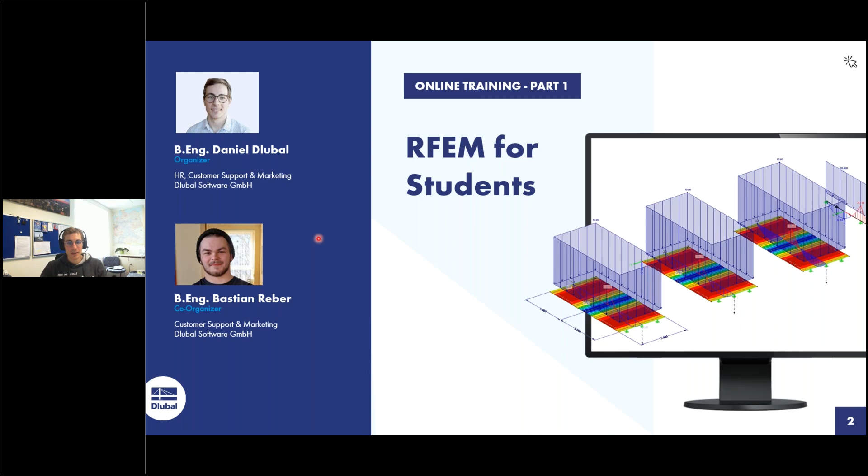Now let's go ahead. For those using the GoToWebinar platform for the first time, I'll show you the general concept. First, if you use the desktop application, it can look like that - you can show or hide the control panel. If someone can't hear us, just adjust your audio settings, maybe change speakers. And if you have any questions, put them in that box, and Bastian or I will answer it.

Then, what is the content of today? First of all, I will explain the principal theory of finite element analysis, or finite element method. Don't be afraid, I won't make lectures like in university, just 2 slides of very basic theory of finite element method. Then I will introduce you to RFEM, explaining the general user interface, the general concept, the general functions where you can find what, and so on. Then together we try to model and calculate a continuous plate.

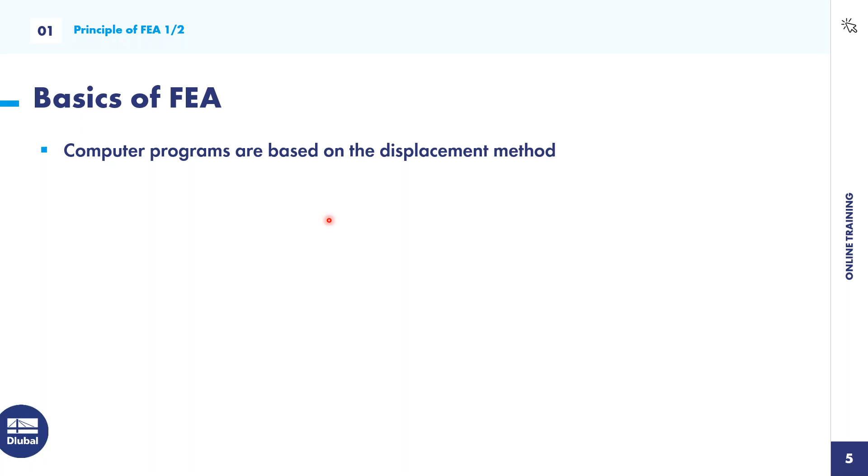But computer programs use the displacement method because it's easier to implement, more convenient, and easier for calculations in the programs.

If you look at any complex structures, it is normal that the analytical solution is not so easy. So it's hardly possible to calculate or find any analytical solution.

This is also the reason why real structures are decomposed into a mesh of interconnected finite elements. At each element continuum and at each node, the properties, especially the degrees of freedom like deformation or restraints, are described at the nodes.

Normally, finite element analysis is just a numerical approximation of an exact solution, so the mechanical behavior is described by approximation. The whole process of decomposing a structure into finite elements is called discretization. Remember that, this is very important: discretization is the decomposition of a structure into finite elements.

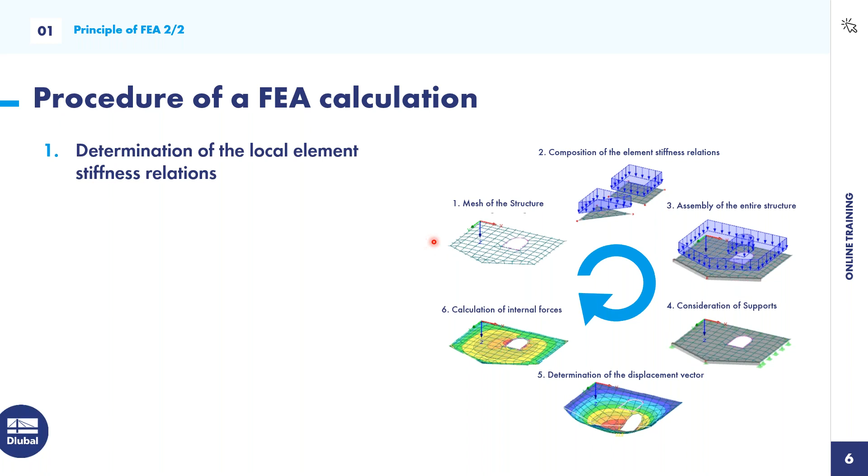So what is the general procedure of an FEA calculation? On the right side you can see this image with the basic steps. First of all, we do the discretization: we determine the local stiffness relations, the local element stiffness matrix at each node, so we mesh the structure. Then we transform it to the global coordinate system and assemble the entire structure.

Then we also have to consider different supports in order for the structure to be stable. So the boundary conditions are very important to define, and normally the boundary conditions are the support conditions.

As we said before, the displacement method is the one implemented in computer programs. So first we determine the displacement vector, and after that the internal forces like bending moment, shear forces, normal forces, tensions, stresses, strains, and so on.

This is also called the solution of the equation system, and then we determine the support forces and internal forces. So this is the general and very short concept of an FEA calculation.

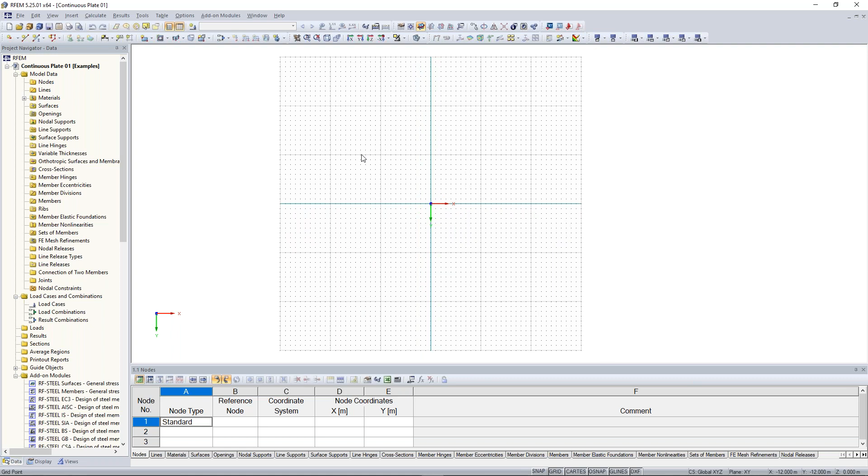So, I will explain you now the whole user interface of RFEM. You don't have to do it now with me, because I will open another project where I can explain the whole user interface on an already existing project. Just watch and remark maybe some information.

So I will open this one here. Fine, very good. I will activate here in the status bar the snap and grid function.

Chronologically, the first step is that we have here the menu bar, and in the menu bar we have the possibility to do almost every kind of workflow function of RFEM. The basic file menu, you can save, open, import, export, insert blocks, save it in the project manager, print, and so on. I think this is known from other software applications.

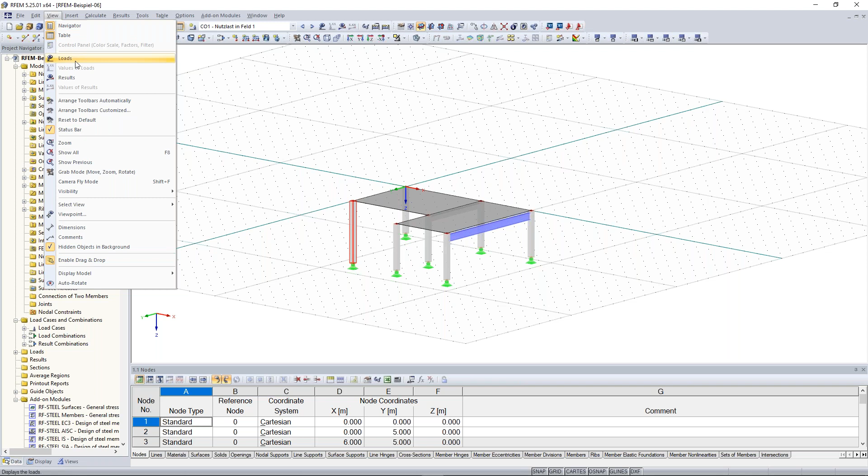Also, you find here additional information concerning the model data, loads, load cases, and combinations. The view, you can click here on loads, then the loads will appear, or click on results—since we don't have any results at the moment, the program asks if I want to have the results, and I click yes. Now I see also the results, and yeah, also some other kinds of things like comments, dimensions, and so on.

So, with this insert tab, you can insert almost every object, from model data to loads and also to load cases and combinations.

The general step in RFEM is that first you model all kinds of necessary objects. You define materials, cross sections, and then you can also model members, hinges, and finally nodal supports. Then you create your load cases and combinations, then your loads, and then you can calculate it, and you have the possibility to watch the internal forces and results. This is the basic step in RFEM for calculating projects or doing structural analysis.

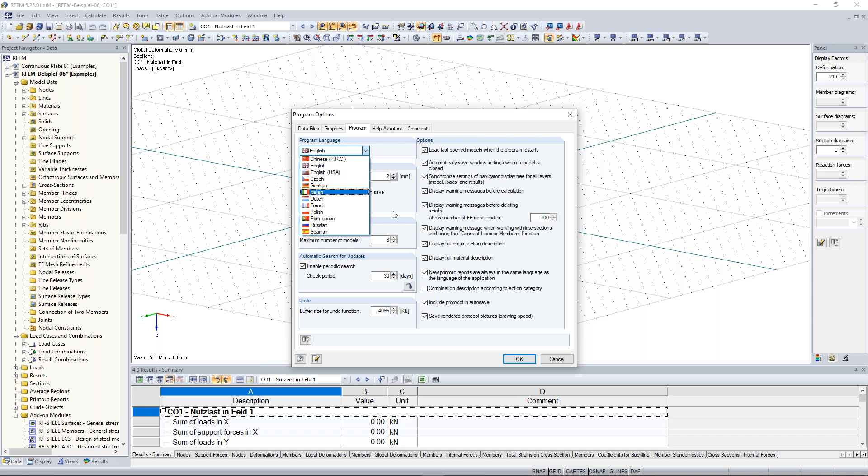You may also notice I use a white background here. For those opening RFEM for the first time, you can change your background. In the options, in the configuration manager, you can change the background to black or white. At the moment I use white, but when I double click on black background, it will change to black. You can also adjust a green or red background—just use the display properties and other colors to adapt your background.

I think this is everything regarding the menu bar.

Under the menu bar we find the symbol bar. The symbols enable a fast way to insert objects, views, or edits. For example, if I want to create a new node, I click on new node and click somewhere, and I get new nodes. The same applies with lines—I click here and then here. I think this is pretty clear.

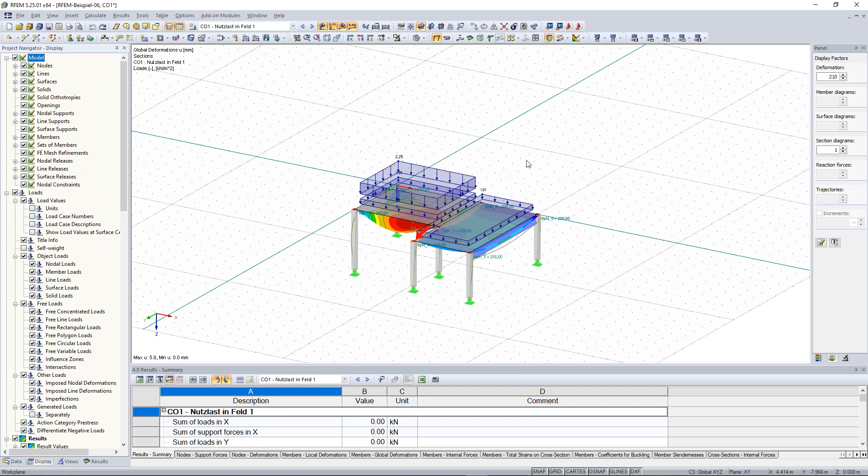In this case, I have activated the loads at the moment. If I don't want to see them, no problem—just click here on loads, and all loads disappear. You can do the same on the symbol bar, using show loads, and so on.

You can also make some models disappear, like the nodal supports. Just click on nodal supports, and the supports disappear—but only in visibility. The same applies to the results, FE mesh. So when I don't want to see the FE mesh at the moment, I click on that and I don't see it.

Good, so far to the display navigator. Let's continue with the view navigator. So if you like a certain view, for example this one, yeah, quite nice.

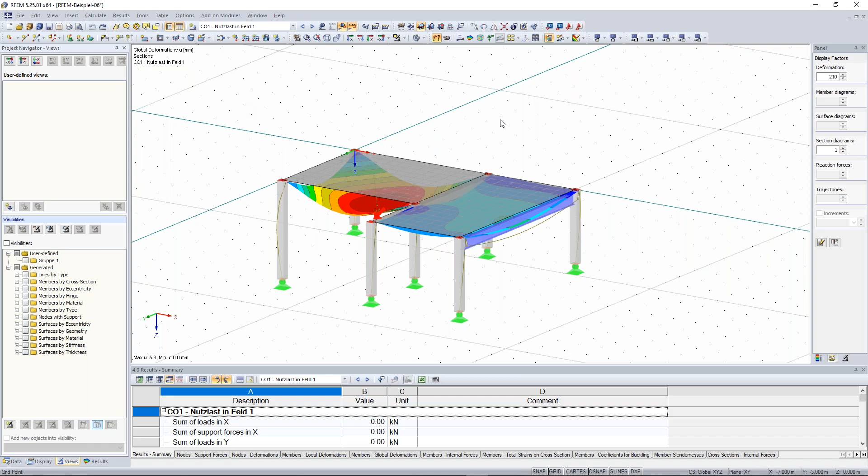Then you can create a user-defined view. Just click here on create new user-defined view, favorite. When you rotate or move away from the model and want your favorite view again, just click on favorite and it jumps back. This is a big advantage, especially for more detailed or complex structures or projects, where you can use these user-defined views.

Good, and with the help of visibilities, you can filter things better. For example, I just want to see all cross sections of this concrete. No problem - go to members by cross section, open this tree, and activate the rectangle 300 by 300. Only this kind of cross section is visible and also possible to modify.

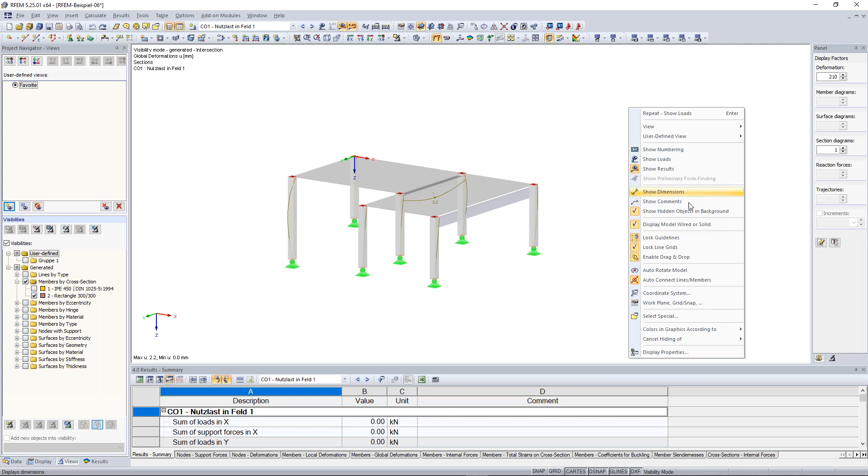You can also right-click and this menu appears, then click on display model, show hidden objects in the background, so the surfaces here will disappear and it will look like that. Undoing this visibility mode, you can click on visibility by select objects, click the arrow, and then cancel visibility mode. The same thing you can also do here.

Good, and now the last navigator, the result navigator. Here I can see results like deformations, stresses, internal forces of members, and also the support reactions. At the moment, I see the global deformation of the whole structure, also from the members and from the surfaces.

If I just want to look at the members, I click on members and choose the right internal force. In this case, I choose the normal force, and there I can see the compression forces in the concrete columns.

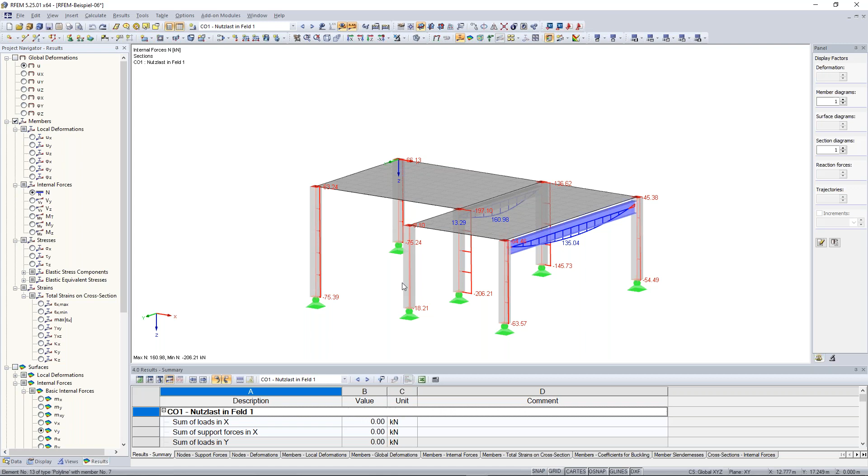Also here, surfaces and internal forces of the surface, mx, my, and so on. And also the support reactions with the components px, py, pz, and so on.

Yeah, good, so much to the navigator. Now, on the bottom of our user interface, we have also the tables. With the tables, we have the possibility to view all information and also to insert and create new information or objects. For example, I can create here a new node.

So I click here on standard. Reference node is my node here, and I enter the coordinates. x is 14, y is 0, and z is 3. And I see here this created node.

And this is also possible for almost all other kinds of objects, like lines, materials, surfaces, solids, and so on. You can jump to the next tables by clicking on the next icons. Now I am at the load cases, nodal loads, member loads, line loads, surface loads, results, and so on.

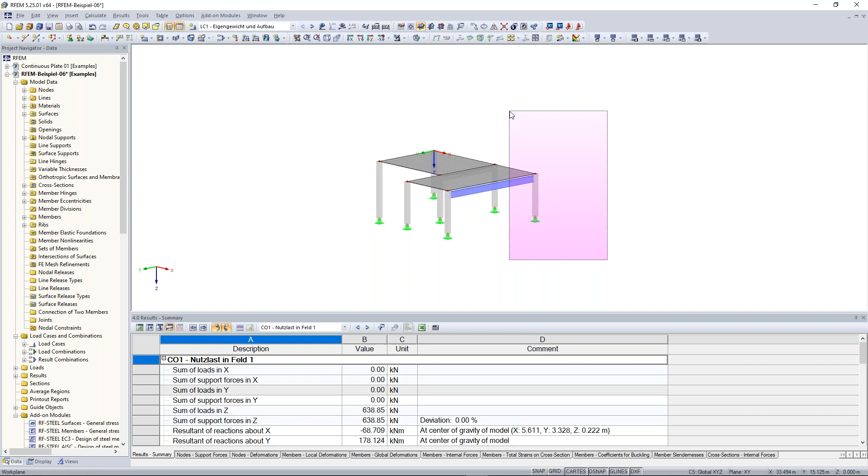Otherwise, when you draw the selection window from the right to the left corner, then everything is selected which is surrounded by this selection window. In this case, it would be the column on the right side, but also the steel girder and the concrete surface. Yeah, this is important to know.

And with the mouse wheel, you can also zoom in and zoom out - I think this is clear. When you press the control key on your keyboard and also press the mouse wheel, then you can rotate this structure. And when you press the shift key and the mouse wheel, then you can zoom in and zoom out.

We offer the same possibilities also with this icon here in the icon bar: move, zoom, rotate, and so on. There you have the same possibilities, and so on.

Good, I think this was everything. Bastian, have I forgotten something or do you want to add something? I think you haven't forgotten anything, and there are also no questions, so I think you can move on.

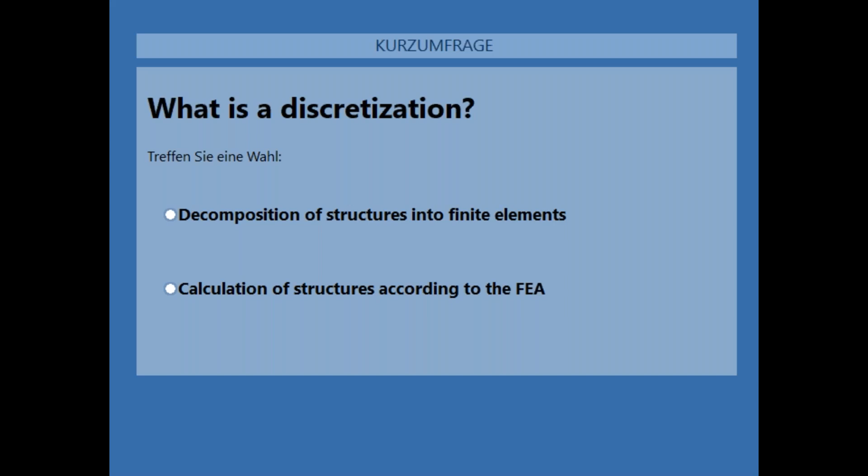Good, most of you have already answered this question, and most of you paid attention to that chapter concerning the general basics of FEA. So discretization, what is that? It's a decomposition of structures into finite elements.

Very, very good. So let's start our example, jump back to the continuous plate. Let's start modeling it. First of all, I create a new surface.

In the symbol bar, I find this icon, new rectangular surface. By clicking on the arrow, I find also other kinds of surfaces, but for me it's good to use this rectangle one. I click on that, and a new window opens.

The next thing I'm going to do is create the material. In this case, I use the Eurocode concrete C30/37 material. For those who don't have this material here, no problem, edit the material by clicking this icon here and open the material library.

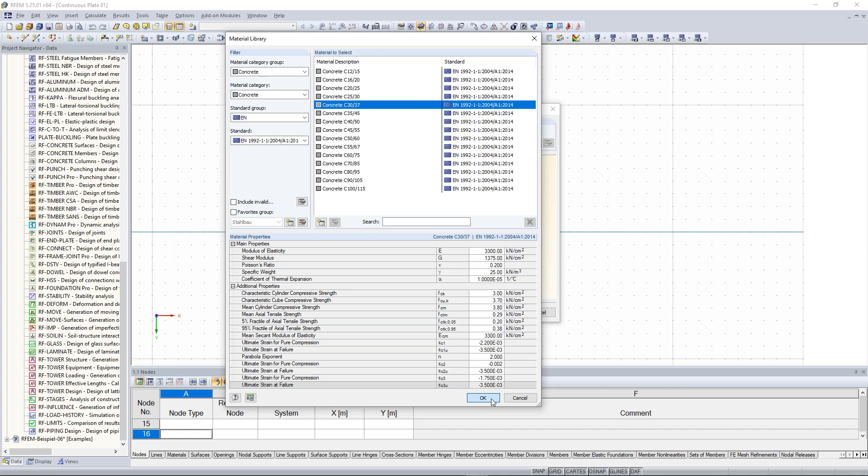I click on OK. Important note is that we set the Poisson's ratio to 0, because we want to get for that example the results which should be constant over the whole plate thickness, so no shear deformation in the plate thickness. I click on OK.

And the thickness of our concrete surface is 300 millimeters. So I click on OK.

And now I draw and activate here the snap function. Now I draw this rectangle from my global coordinate system, 10 meters to the right side and 5 meters high.

Good, now right click and I close this way of inserting a new surface. So now I see here the rectangular surface, and now I can copy it or create a new one.

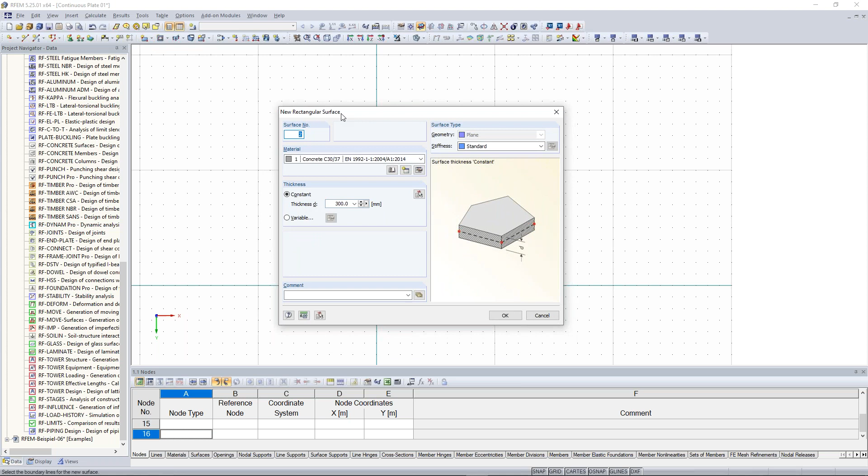Now one tip, please remember this, it helps me a lot. By clicking the enter or return key on your keyboard, you do the same task again. So our task was the creation of this new rectangular surface. When I click the return key or enter key, it will open this new rectangular surface window again, and I click on OK again.

And I create the same surface again with the same geometry, now here again at a distance of 5 meters from the right upper corner node. So now we move this 10 meters downwards. I select all 3 plates, snap here near this middle surface, near the left bottom corner, and move this to my global coordinate system.

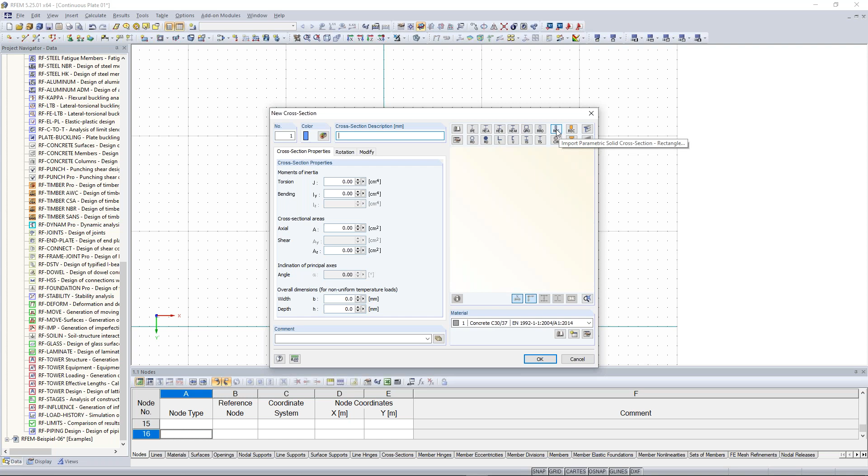And I click here the import parametric solid cross section, a rectangle. The width of my cross section is 1000 millimeters, and the height is the same as the thickness of my plate, 300 millimeters. The material is the same, concrete C30/37.

I click on OK, and it looks like that. Here I get the cross-section description, also with the cross-section properties, like the moments of inertia, bending, torsion, and so on. I click on OK.

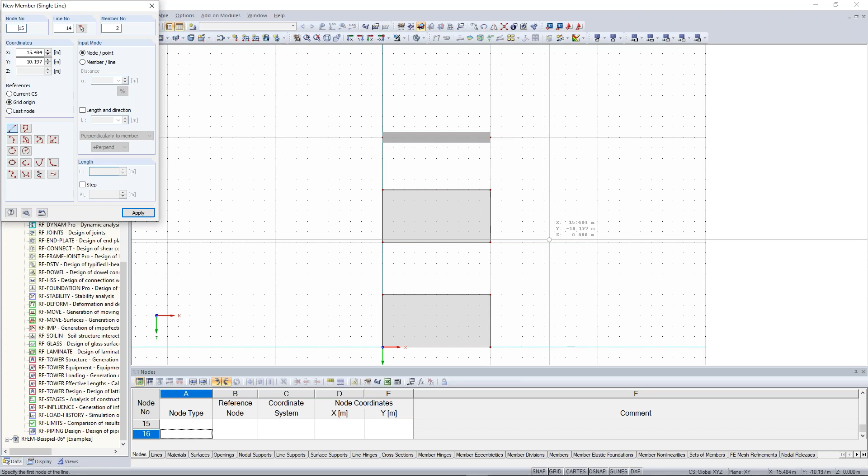And now the member start has the cross-section of this one, and the member end also has the same. I click on OK. And now I draw it from left to the right, also 10 meters long, and close it with the right click.

Good. Now I can rotate it a little bit, and now I can see it from a 3D perspective.

So the next thing is we want to have a continuous beam and also continuous plate. Therefore, I have to create lines in the middle and also nodes here in order to create supports afterwards. So how can we do that?

We can divide this line into 2 lines, and then we get the middle node. Then, with reference to the middle node, we can create the next line perpendicular to the other end.

So you can also see here the line, the red line, and also the arrow. The arrow shows from the left to the right side, and this symbolizes that the starting node is on the left side and the end node on the right side.

With a right click on one of the line nodes, I can also show the local axis system, and this is similar to the line direction. So the local x-axis of every line or every member is the same as the line direction. You see it shows to the right, the same direction.

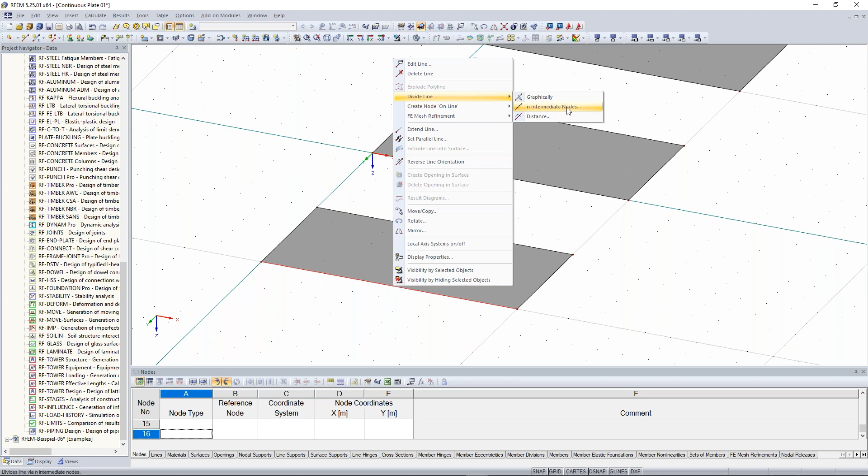I just want to have a middle node, so I can divide it into n intermediate nodes. When I enter 1, it will be divided into 2 parts. When I enter 2, into 3 parts; 3 into 4 parts, and so on. So I click on 1, and I see this node, and these 2 lines are divided.

Next thing is that we create this line perpendicular to the next one. So click on new line, and draw this line from there to there. Double right click and we can close this.

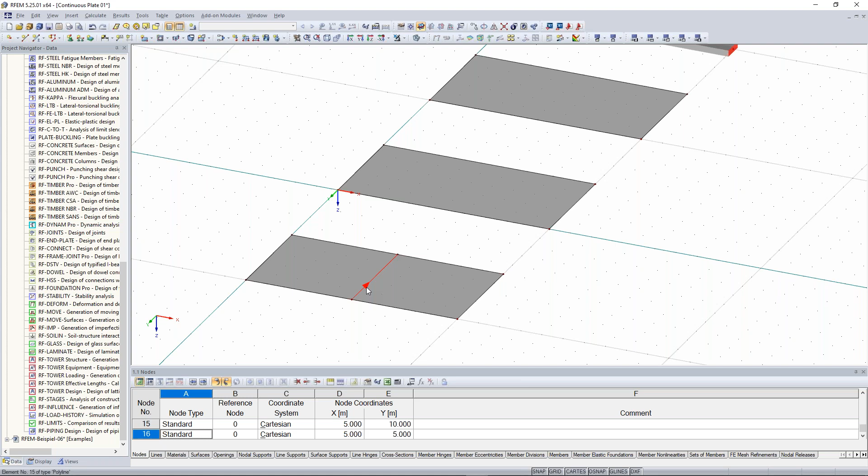Now it comes to my favorite way of creating objects, and this is copying via drag and drop. We can easily copy this line by drag and drop. Just click on that line, press the Control key on your keyboard, and now the left mouse, click and hold, and put it onto the other surface. We do the same thing for the other one.

Good, now let's divide this member here. Press right click, divide member. Now you can do it by distance or graphically. I decide to do it by distance, and now it's also interesting how we can do that.

We want to divide it exactly in the middle, so we can choose 50% as relation or the absolute value. It will start from the member start or from the member end. Now here you can see the arrow, and this arrow shows from the left to the right side. When I want to have a division 3 meters from the start, I have to enter 3 meters here, and the member end will be calculated automatically.

The same thing with member end: if I want to go from the right side, so from the member end, I press 6 meters, and the member start will be resulted automatically. But in our case, 50%, because we want to divide it exactly in the middle. I click OK, and we get this new node.

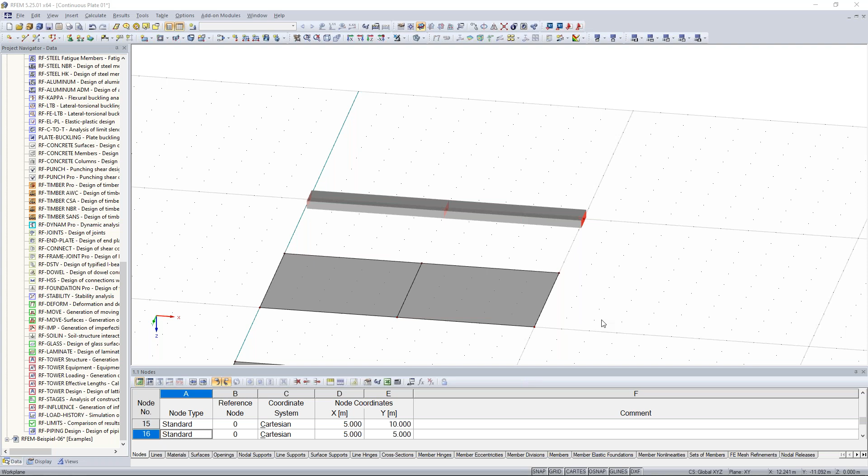I think what you can do is show us again how you can edit the cross section, for example of the beam, and yeah, I guess that would be nice to see again.

Okay, of course. So there are different ways to do it. You can do it with the help of the data navigator. Here you have the cross sections. Open this cross section, and by right click on this rectangle, you can edit this cross section.

Click here on edit, and then you can also edit the description. If you only have, for example, 900, you can add 900 and 200, for example, no problem. Or if you want to create a completely new one, no problem. Just click on any other cross section, like an IPE profile, choose one of the IPE profiles, and click OK. You'll have a new cross section here.

Yeah, this is one way of doing this. Or you choose the whole member by selecting it, right click, member, and edit. Then you can modify your member by editing the cross section for the member start, or create a new one. It's the same procedure as with the data navigator.

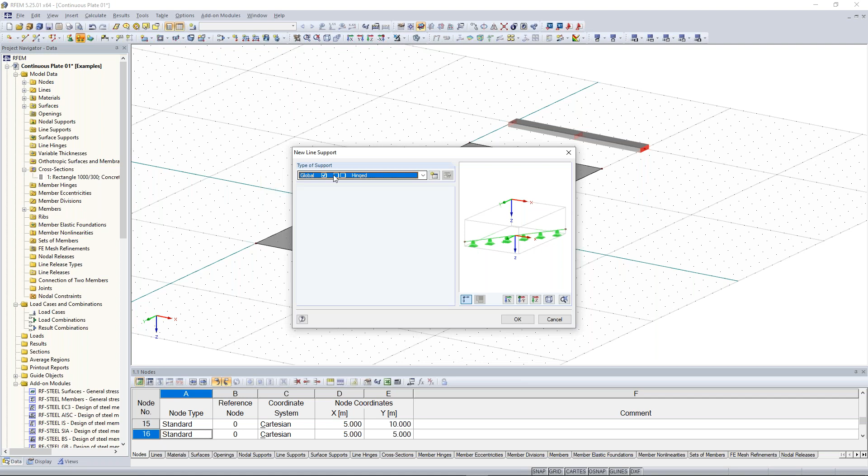We choose this hinged support. I click OK. Now I draw, and this is the big advantage of RFEM: I can choose and select several objects at once. So I rotate my interface a little bit, and now I draw a selection window from the right to the left side in order to get all three middle lines here. And I do the same thing with the other surfaces.

Good, now let's come to the member. Here we do two different kinds of nodal supports. The first one is a new type of nodal support, so I click on new type of nodal support. Now let's look at this definition of support conditions.

So if I activate or check one condition, like UZ, then I activate the deformation restriction in UZ, so no deformation in this direction is possible. Therefore there will be some forces. And the same also with restraints.

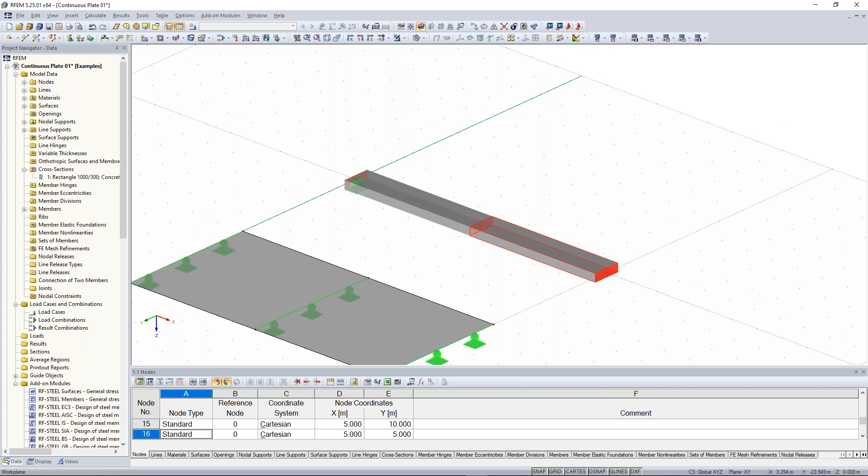Good. Now click OK. Draw a selection window just for the first node on the left side, and for the other two nodes you can now draw also a selection window. It's no problem that the member is also selected, because we want to create an object just for nodes, and the program recognizes it. So click here on New Nodal Support.

And now we can choose the normal hinged support. Because we have already selected the nodes, the nodes appear here also in this box. Click OK, and the two supports were created. Okay, good.

Now the next step is the creation of loads. Before we add some loads, we have to create load cases. Click here on New Load Case in the symbol bar. You can also do it here: load cases, combinations, new load case. Same procedure - as you can see, we have more possibilities to insert or create something. So, new load case.

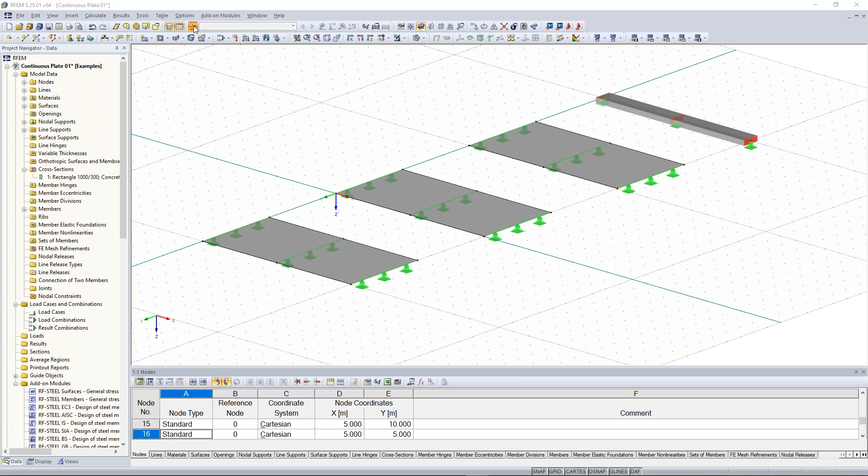For our simple example, we insert the name or description 'test load' and deactivate the self-weight in order to compare the results better. Then I click OK.

And I add the loads on the surfaces. Good. And now let's do the same for the continuous member.

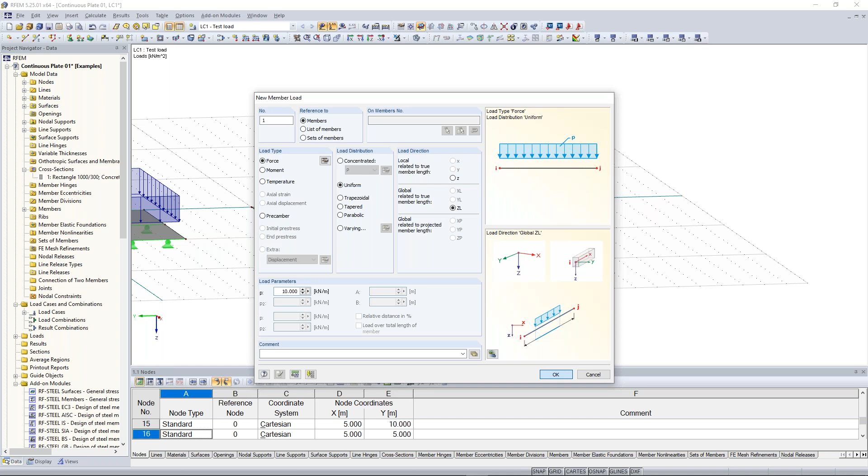Please keep that in mind - that for members I use member loads. So I click on member loads, enter the same load parameter, 10 kilonewton per meter, click OK, and I choose both members.

Good. And the display of the member load, I can make it a little bit smaller, so I decrease the size here. So now it looks good.

Nice. So the next part is the creation of the refinement, so every surface gets a different mesh size. In order to do that...

I create here FE mesh refinements. Normally, the whole settings of the FE meshes are managed here at the Calculate tab under FE mesh settings. Here you set the general target length of the finite elements. So if I would do nothing, every surface would get a finite element length of 0.5 meter. But in this case, I want to have a different one for every surface.

So I do here FE mesh refinement, right click, new FE mesh refinement. I choose here at first surface, target FE length 1 meter, so we get 1 meter big meshes. And now I have to choose the surface, and in this case, I choose the first surface. I click on OK, and click on OK again.

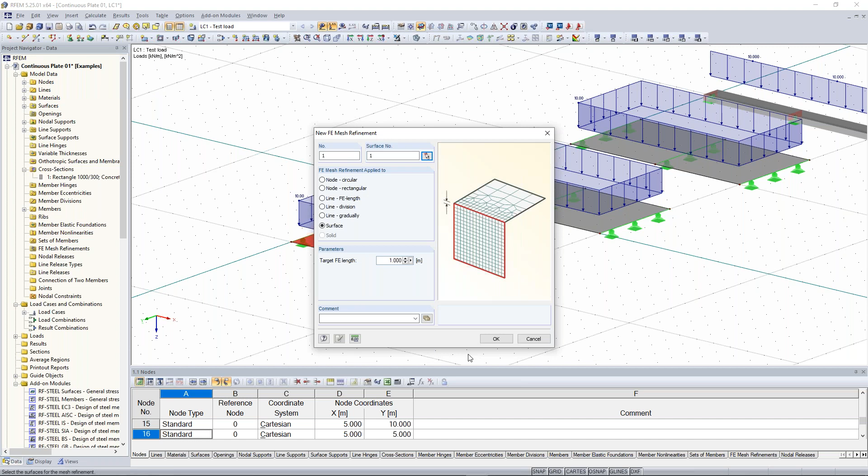Now let's do the same thing again. Right click here in the data navigator, new FE mesh refinement, 0.5 here at the target FE length, and the surface is this one. I click on OK, on OK again. And now here we do a different way of insert.

Right click, FE mesh refinement, new. Because we have already selected it, it shows me here that we have this third surface. We create a new FE mesh refinement, 0.1. Here we see the FE mesh refinement with this quadratic object symbol.

Yeah, and now I would suppose that we calculate it. But before we do it, in order to compare the results better to each other, it would be quite helpful if we have sections here at the surfaces. In order to do that, here in the data navigator, we have also the possibility to create sections. Just right click, new section.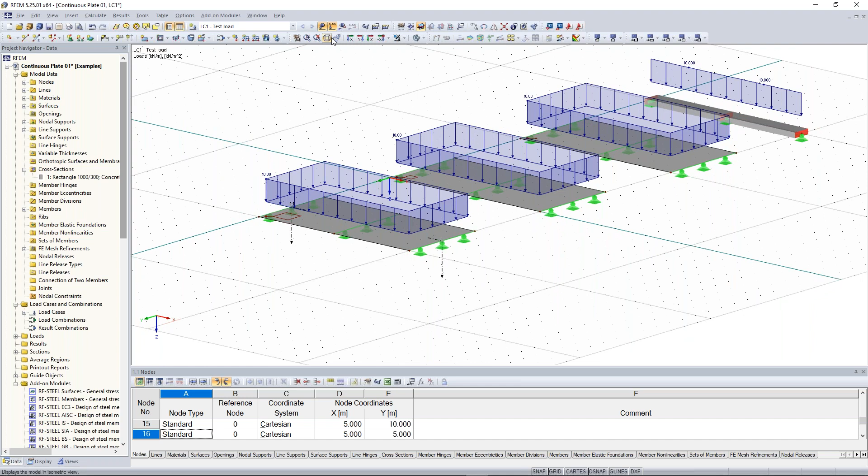Now I have to set or choose the edge points of the section. This will be the middle of this line to the other middle of this line, and I click on OK. Now I see here the section. Maybe I can hide the loads here by clicking not to show the loads.

And now, one of my favorite ways of creating things in RFEM is drag and drop. So press the Ctrl key, left mouse click, and copy it from one side to the other, so from one surface to the other surface.

So, modify or edit here the section name, and choose here the correct surface. And let's do this thing again, choose here also the correct surface, and click on OK.

Good, now I think we have everything. What do we need for our calculation?

The next thing is starting the calculation. Therefore, you can use here calculate all in the symbol bar, or also calculate RFEM results only, or to calculate, and there you can choose your load case or your load combinations and so on. The topic of defining load combinations and so on will be part of the next chapters, the next parts of our student series of online training. So I click here on calculate all.

And the first thing we're going to see are the deformations. So here the deformation, and also a very nice thing is when I change here the display model to the wireframe display model, I see here also the size of the FE meshes. And as we said before, here in this first surface, we have a FE mesh size of 1 meter, 0.5, and 0.1.

Good. In order to see the results here at the beam, we have to activate members, and we see here the bending moments. Field moment, support moment, also the shear forces and so on. But I think this is clear.

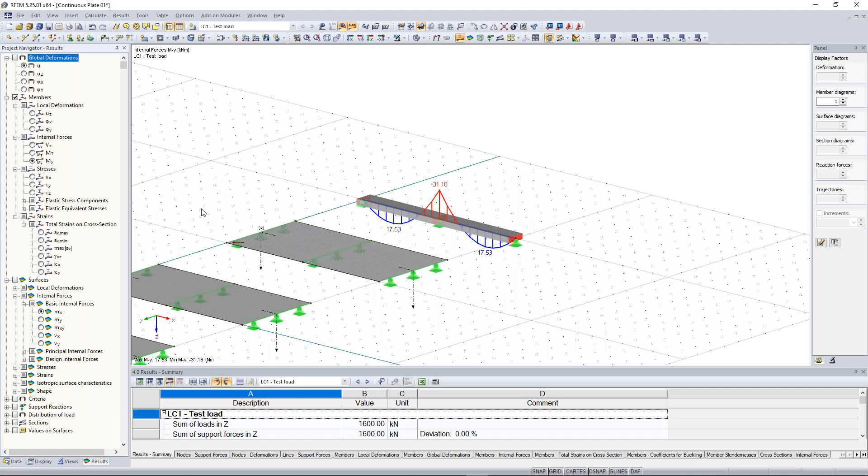More interesting are maybe the sections of the surfaces in order to see the bending moments of the surfaces. Therefore, I activate here in the result navigator sections, and I want to see the bending moments. So I have to activate here surfaces and choose here MX.

One hint to the basic internal forces of these surfaces. You can see here also the local axis of every surface, and at the moment I deactivate maybe for the moment the results.

Just see what I want to explain you. Here we see the local axis of this surface, the x-axis and the y-axis. The x-axis shows to the global x-axis, and the local y-axis also to the global y-axis there.

So now, important point, the basic internal forces like mx and my, they are located in the same direction like here. So mx is along the x-axis, to the local x-axis of this surface, and the same for my.

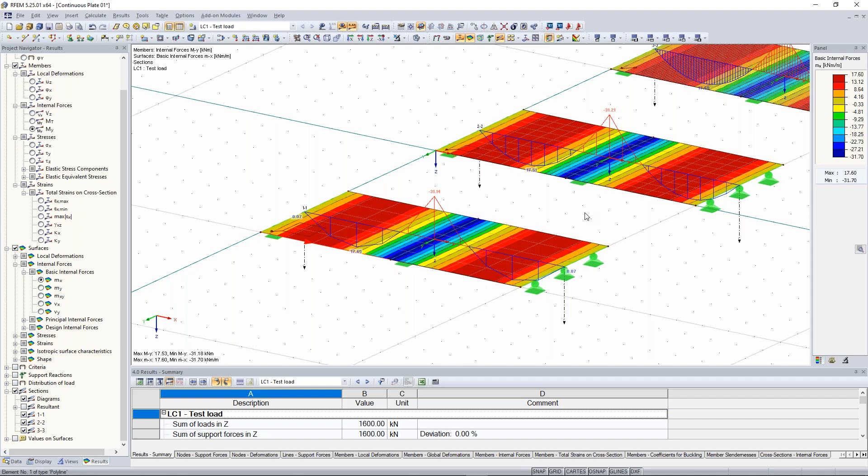So let's watch the results together. So here we can see, okay, the results are pretty okay, especially the one here with the fine mesh. There we have the same support moment like here with this member. Okay, this looks pretty good.

In general, the results are quite good, especially the extreme results, like here the field and the support moment. But now this will be very important.

The length of this FE mesh, here you see it's linear, and normally it's everywhere linear, but here we have in 1 meter just one FE element, and here we have 10 FE elements in 1 meter.

So the approximation of the results will be here very incorrect, I would say, or not really exact. And here it's more exact. You see it here at the distribution of the moment section. And it isn't really exact in comparison to that one where we have really fine FE mesh sizes.

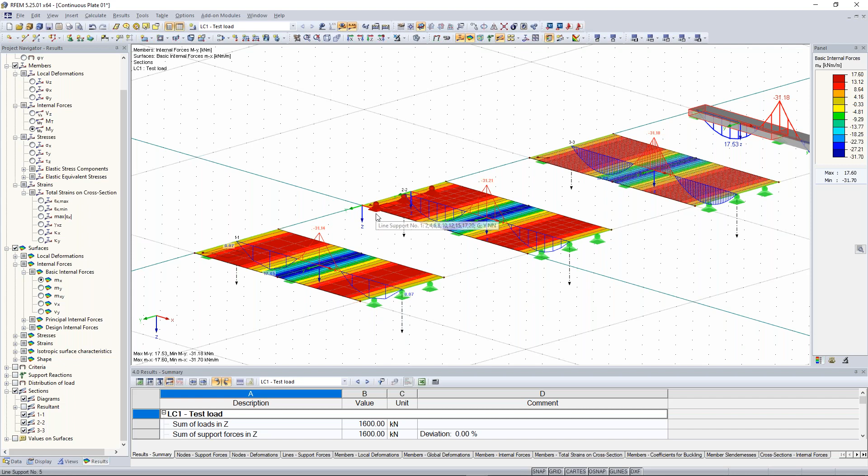This is what is really fine, because when you compare maybe the two sections together, result diagrams, and I watch here this one. So the first section we have here basically somewhere at 0.57 kilonewton meter, and here also 0.5, almost 8. So this is a difference, and this is something to remind.

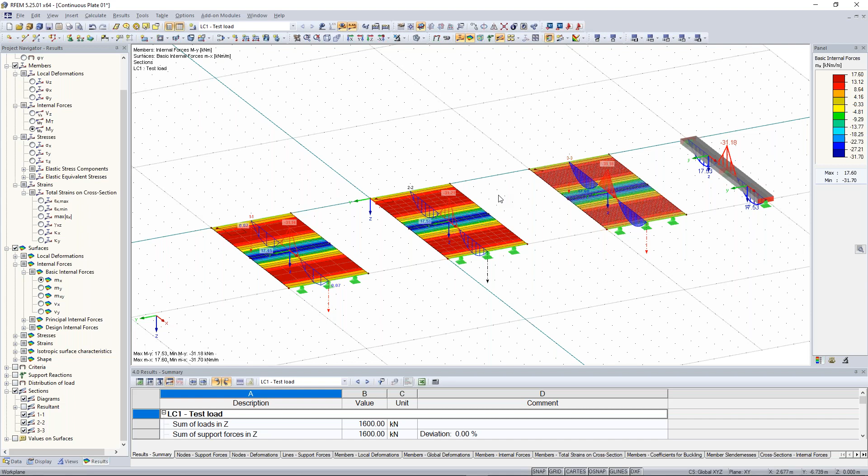So you have to know it. I would suppose you do that FE mesh quite fine, but not too fine, because when you have too fine FE meshes, then the calculation will take very long. So you have to find the right proportion, the right FE mesh sizes, in order to have correct and exact values, but also consider the long calculation of FE programs.

Now I see one question, and this question is, what is the suggested FE mesh size? I would recommend you to have at least 4 up to 6 or 8 FE meshes in one surface.

So we have here from there to there, it's 5 meters. So at least there should be from one boundary condition to the other boundary condition, at least 5 up to 6 meshes, finite elements. So I would say this one is quite good, this with the mesh size 0.5 meters.

This one is very fine, and it is not so important to have so fine FE mesh.

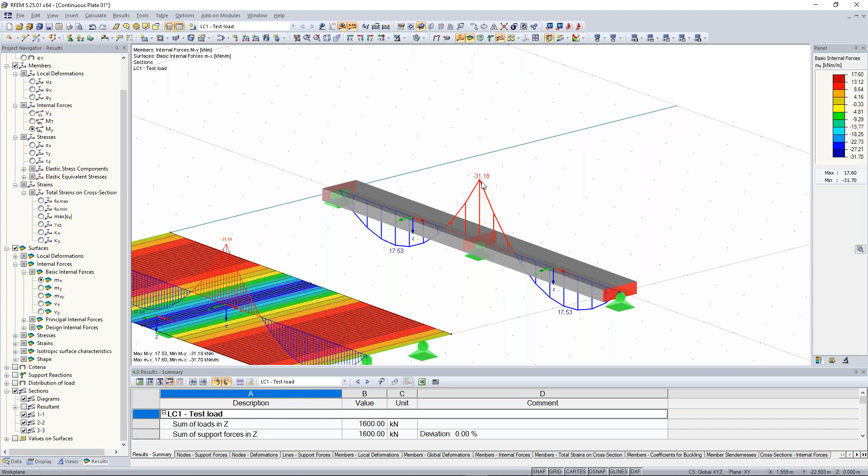Normally in the study, you do some hand calculations. That's pretty common, and you use tables or calculators. When you calculate the support moment of a two-field beam or continuous beam, you might get different values. Let's watch the results again. Normally you would get a support moment of 31.25 kilonewton meters, but in this case, just 31.18.

Why? It's due to the shear activation of members. So I go here to calculation parameters, and here you see the activation of shear stiffness of members. If I activate it, it considers additional shear forces and therefore also additional deformation, and you calculate it as not as stiff. So in Germany, you would say schubweich. With the activation of these cross-sectional areas AY and AZ, so additional areas of cross-section.

This will be very interesting for the next chapter, because I have also prepared a PowerPoint for that. So I jump back to my PowerPoint.

Now I want to take a look at the plate theory. First, we try to relate it to the beam element. On one side we have the Bernoulli beam, and on the other side the Timoshenko beam. The Bernoulli beam says the cross-section remains in plane, and also remains perpendicular to the member axis. We don't consider any shear deformation, so we have really rigid shear stiffness. When you calculate something in the study with tables, you calculate a Bernoulli beam.

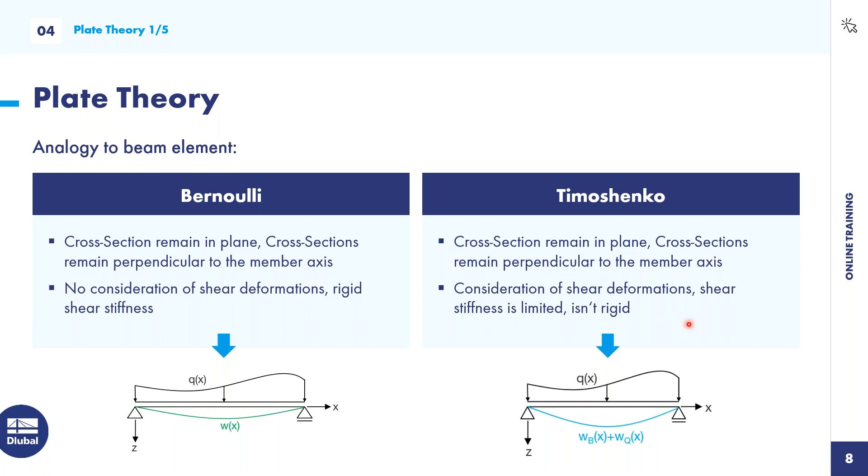But what is mostly implemented in FEA programs is the Timoshenko beam, or the plate theory equivalent. First, the Timoshenko beam: the first condition is the same, the cross-section remains in plane and perpendicular to the member axis. But here we consider shear deformations, so the shear stiffness is limited and not rigid anymore. It remains perpendicular to that axis, but here we get an additional angle, so it won't be perpendicular anymore to the member axis - additional deformation in the Timoshenko theory.

Now let's transfer the beam theory to the plate theory. The Bernoulli beam corresponds to the Kirchhoff theory, and the Timoshenko beam to the Reissner-Mindlin theory. What are the conditions? We have a geometrical linear system, so small deformation, Hooke's law, cross-section remains flat with no warping, and a constant thickness, and we don't consider any shear deformations. For Reissner-Mindlin, the first four are the same, but we consider shear deformations and also the transverse and lateral strain. What is that last one, the transverse or lateral strain?

When I have this kind of beam and I try to tie it with a force, it will get a little bit longer. That part, where it gets longer, is called delta L. Also, the cross section becomes a little bit smaller. This effect is called the transverse or lateral strain. In German, we would say Querdehnungseffekt.

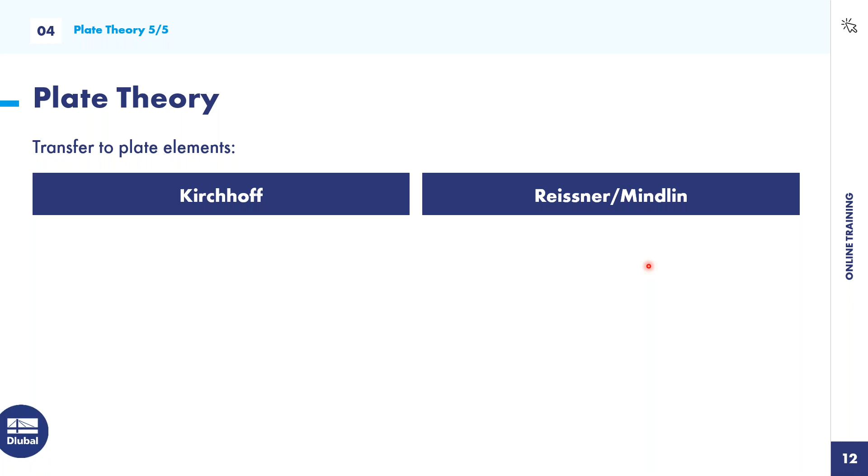So again, as a summary: Kirchhoff on the left side, Reissner-Mindlin on the right side. Kirchhoff is the same as the Bernoulli beam, and Reissner-Mindlin the same as the Timoshenko beam. At Kirchhoff, we don't consider any shear deformations, and at Reissner-Mindlin we consider shear deformations. So what can we use Kirchhoff for? We can use Kirchhoff for the theory of thin plates - normal concrete surfaces, like in story buildings or similar, where we get quite good results with the Kirchhoff theory.

It's a simplified approach. The Reissner-Mindlin theory considers shear deformation, and we can use it for thick plates as well as thin plates. When you calculate according to Reissner-Mindlin, you get quite good results for both thin and thick plates, because it's a higher-order approach and gives more accurate shear forces. So my recommendation is: please use Reissner-Mindlin, because then you get quite good results for almost every application area. When you use Kirchhoff for very thick plates, like plates with a thickness of 2 or 3 meters, such as foundations, the results won't be so correct.

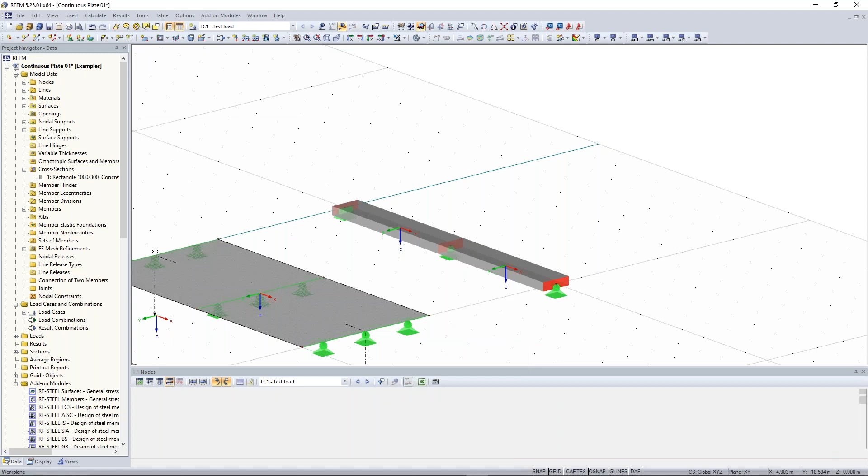I recalculate it, and I will get the support moment of my two-field beam of 31.25. This will be the same when I calculate it according to tables, or when I do this by the force method or by hand. So keep that in mind.

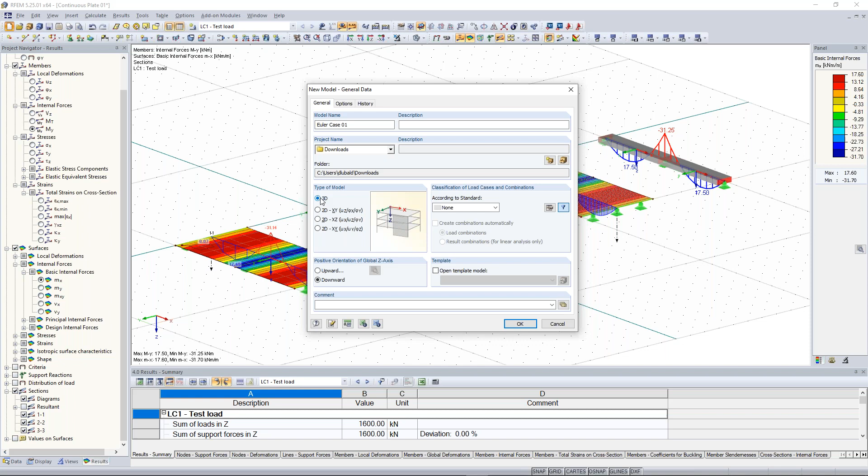I create a new file, a new model here in RFEM, new model. And in this case, I insert here Euler case 01, save it under downloads. Very important now, I want to consider a 3D model, because we calculate a stability analysis of this Euler beam, and there I want to consider both buckling directions. So therefore 3D, I click on OK.

And what we're going to do now is create this column. Therefore, click here on New Single Member. Click on Create New Cross Section for Member Start.

And we choose here a steel profile, what is very common in Germany, HEB 300. So I click here on Import Rolled Cross Section HEB, or when I can't find it here, you can also import cross section from the library. Click here on I-sections, and choose here this HEB. So what are HEBs? These are wide I-beams with parallel flanges.

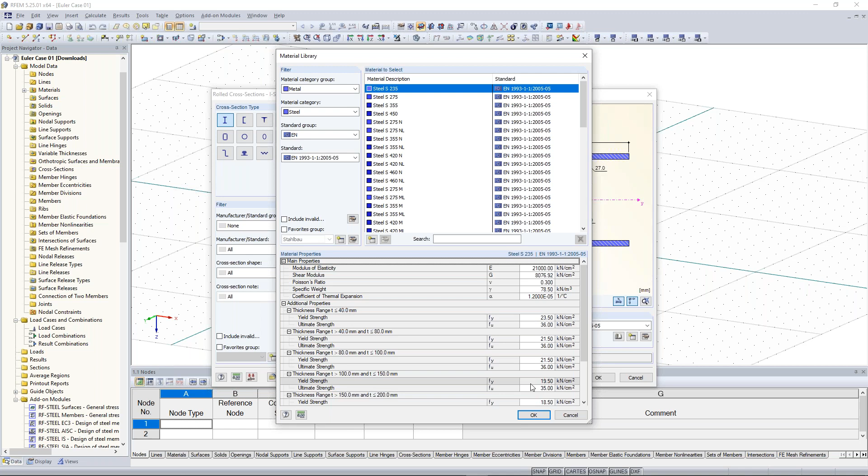And we choose here this HEB 300. Material is steel S235. We can also edit this material. I choose here this steel material according to the Eurocode. You can also import some material from the material library. Steel S235, because of this yield strength of 23.5 kilonewton per square centimeter. I click on OK.

Again, and now I want to create this column, and this is also maybe one of the mistakes - when I want to create a column and I'm not in the correct work plane, I can't model it into the height. Yeah, it doesn't work because I am here in this work plane.

Two possibilities: I change the work plane, for example to XZ, and then I draw it 10 meters high. Or if I want to stay in the same work plane as before, in the XY, I have the possibility to create this beam with the help of the length and direction. And now I say okay, perpendicular to the work plane, 10 meters high, and the opposite of the global Z direction, and I have the same result as the left beam.

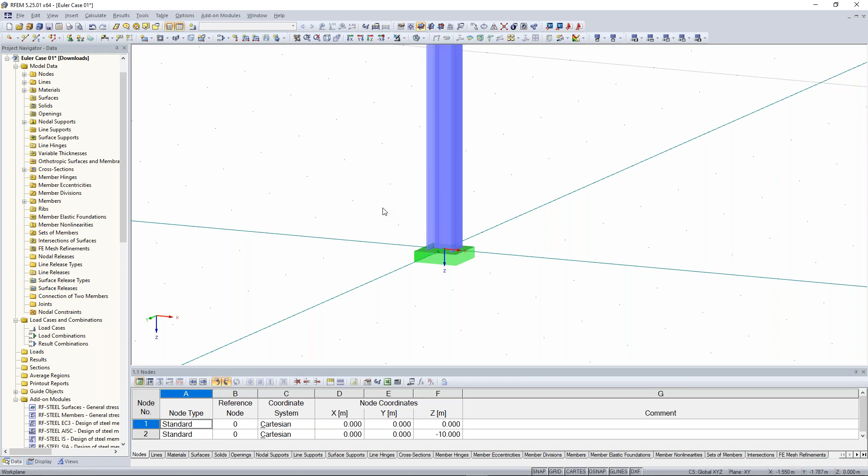Good, now this was everything concerning the creation of the model. Now we create a new load case. Again, load case will be test load. And we don't consider the self-weight again. And I click on OK.

Now we create a new nodal force, on that node here. Therefore, we click here on New Nodal Load, you find it here at the symbol bar. This nodal load refers to the global coordinate system. I put here a horizontal force in the global X direction of 10 kilonewton, and a vertical force of 100 kilonewton. I click on OK and select the head node here. Good.

Now let's calculate this thing. Show results or calculate all, doesn't matter. And what we're going to see now is the deformation. In this case, the deformation is shown as 63.5 millimeters. We can show the deformation a little bit nicer.

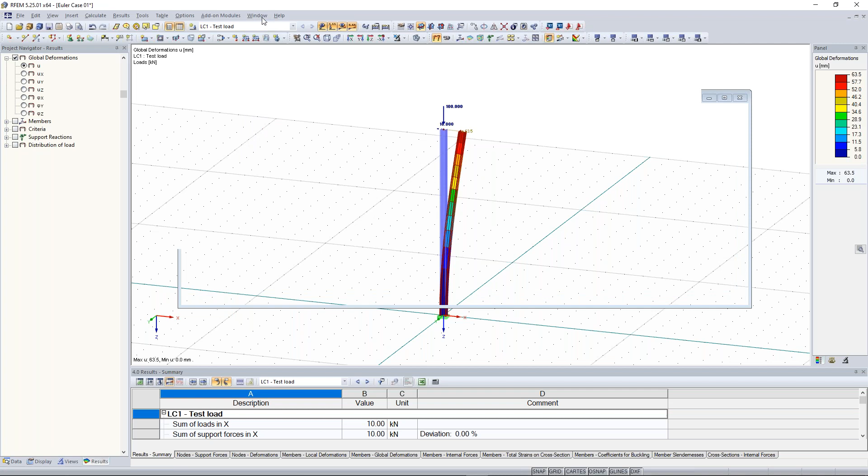Therefore I want to show you the differences. I will create 3 windows in order to show you the results of this column a little bit better. So I click here, new window, again on new window, and show the windows in 3 panes. Perfect - I'll change the view to the opposite of the Y direction.

Perfect. So what we're going to do now is go to Calculate in the menu bar and go to the calculation parameters, then go to the register Load Cases. There we have our load case, test load. Normally the load cases in RFEM are preset with the theory of first order, so we have a geometrically linear analysis.

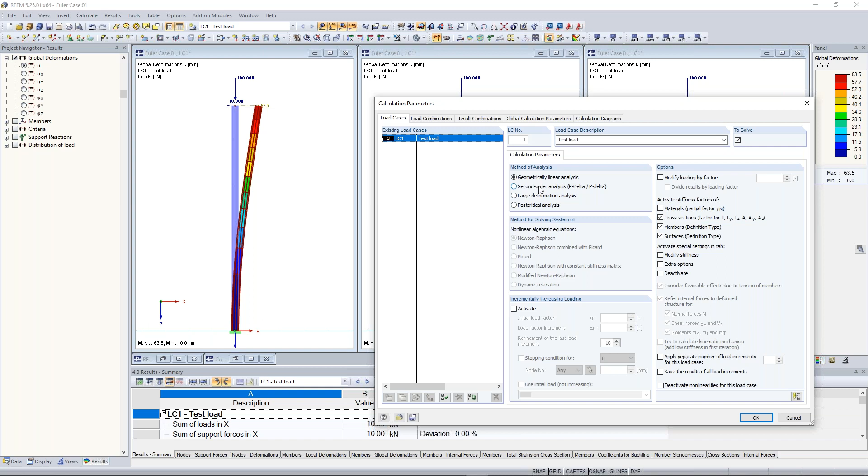Now we're going to do a nonlinear geometrical analysis, so we choose the second order analysis, P-delta - I think especially the American guys know this as P-delta. I click here on second order and calculate it. So let's calculate it.

Maybe you see also here the deformation - they are a little bit different, but this is not the main point. I take a look at the bending moment, especially at the bottom. There we have 106.87 kilonewton meters. Normally we have a length of 10 meters, a horizontal force of 10 kilonewton, 10 multiplied by the lever arm of 10 meters is 100 kilonewton meters at the bottom as the internal bending moment.

So you don't have to do it again, I will show you the internal forces again at the analysis of a geometrically linear analysis, theory first order - here 100 kilonewton meters. Now again with theory second order, we get an additional 6 kilonewton meters.

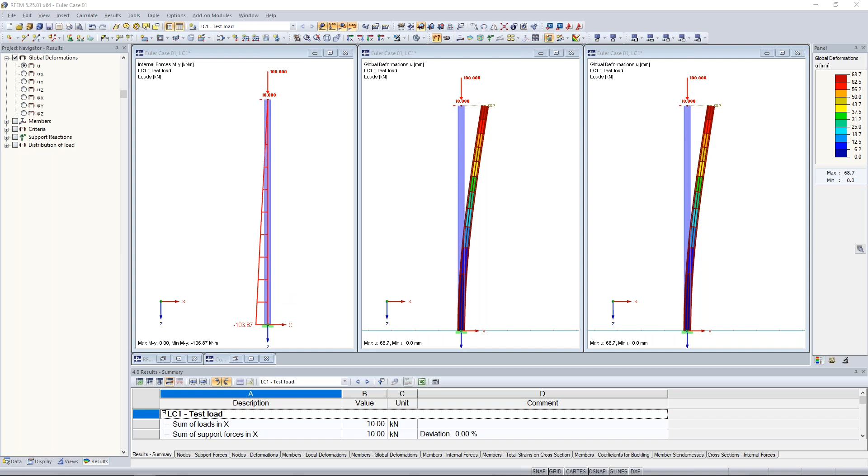Good, now let's come to the stability analysis. This is also very important, especially when you are dealing with steel structures - there you will need it.

So first of all, I will create only a vertical force, so I will delete here this horizontal component. I will show the grid again. For stability analysis, in order to get the buckling or the eigenforms or the critical load factors or the critical loads, critical lengths, you have to use one of our add-on modules, and this is RF-Stability.

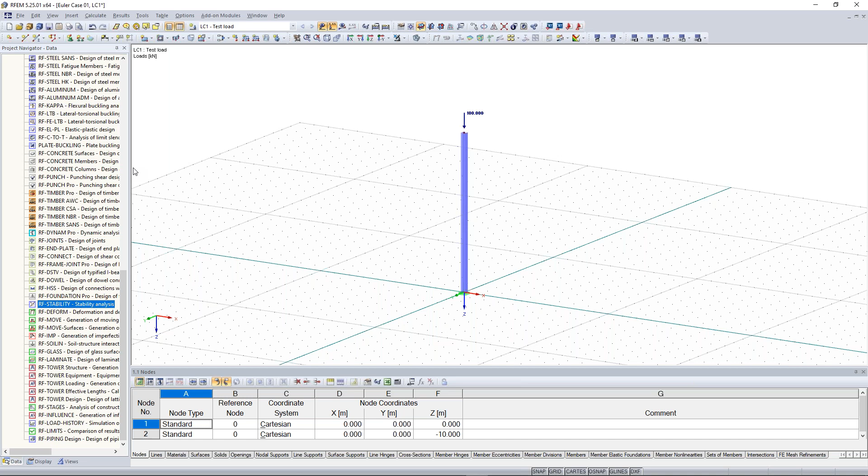You find RF-Stability here in the data navigator - scroll down, here you will find it, RF-Stability. Or you find it also here in the menu bar, Add-on Modules, Stability, RF-Stability. So this new window will open, and this is what you can do with RF-Stability.

With RF-Stability you can do any stability analysis by the eigenvalue method. So you can calculate eigenforms, buckling forms. You can get the critical lengths, critical forces, critical loads, and so on. This is very good in order to detect maybe some weaknesses of your structure, or to detect some critical points and so on.

Therefore it's very good. Now let's do the typical Euler case number 1. In your studies, I think you have already learned how the first eigenform, or the critical buckling of one Euler case, looks like. Let's do the same here in RF-Stability.

First of all, number of lowest eigenvalues - in this case, Euler case 1, there are only 2 cases important, so I choose 2. We have the buckling around the weak axis and the buckling around the strong axis. We choose the load case 1. We don't need to consider favorable effects due to tension, and also no prestress for cable and membranes. But I would activate the division of straight members and set the minimum number of member divisions to 10.

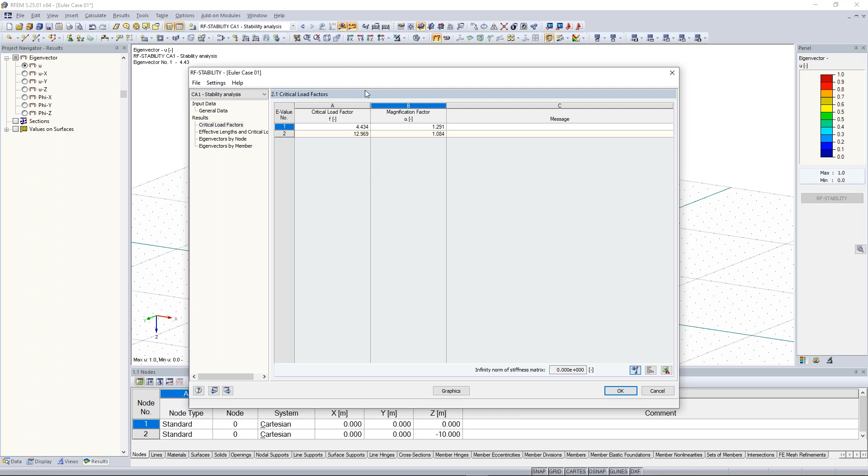Okay, now as a summary: the critical load factor says with which factor I have to multiply my system, my loads, in order to get an unstable system. So if I multiply the 100 kilonewton vertical force by 4.43 or 4.434, I will get a critical load of 440 kilonewtons, and then my system becomes unstable.

So let's watch the eigenform graphics. The first eigenform of this column is buckling around the weak axis, which you can see here. The weak axis is the z-axis, so my system buckles around the weak z-axis - this is the first eigenform. The next eigenform is around the y-axis, because the y-axis is the much stronger axis. I think this is pretty clear. Therefore, because the strong y-axis can resist more load, the critical load factor is higher, and also the critical load is higher.

Good, now let's see what happens when I increase the load from 100 kilonewtons to 443, still under my critical load. Let's calculate this - calculate all, because when I also have an add-on module open, I have to click calculate all in order to get results from every load case and every add-on module.

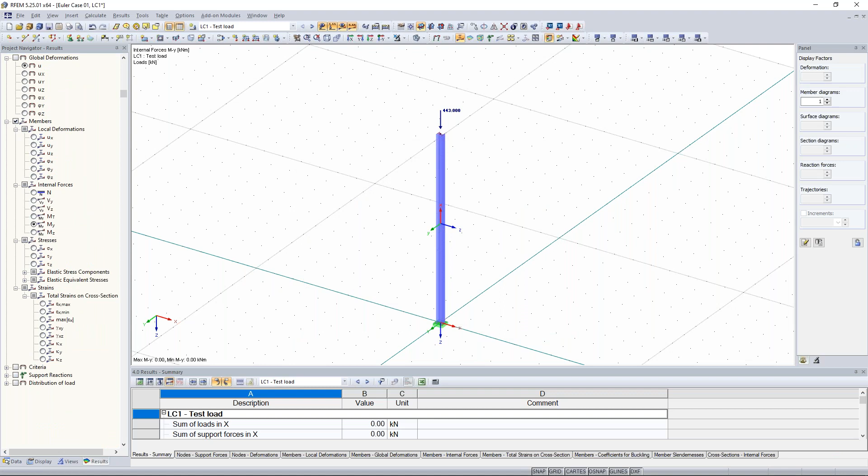Good, okay, RF Stability - now we can see it. The critical load factor is exactly 1. This means that the system, with a load of 443 kilonewtons, is almost unstable. Now let's see what happens when I increase the load to more than 443, to 444.

Now we get the result, and a calculation error: the stiffness matrix is singular, the model is unstable. And this is the reason - the model is unstable because of that too-high load. So in this case, my system is unstable, the stiffness matrix is singular.

For that, we have a very good FAQ. Bastia, maybe you could put the FAQ in the chat - this FAQ will help you find the problems or critical locations of why your model is unstable, especially at the beginning of modeling with RFEM. It's possible you'll find these problems.

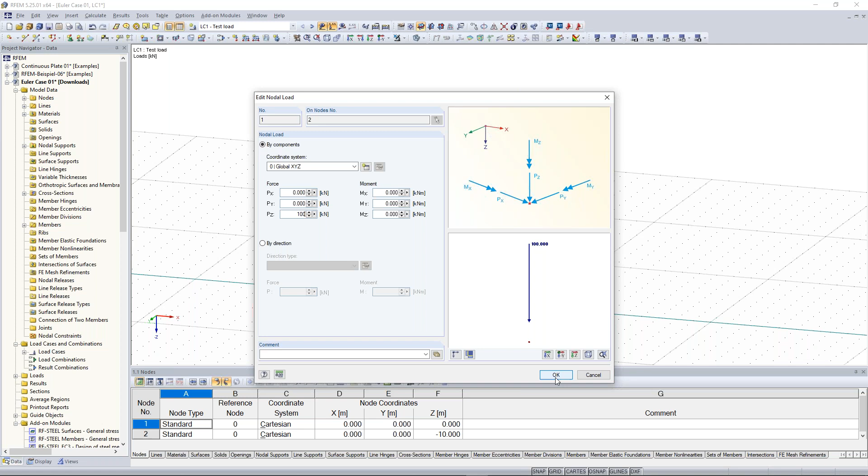Therefore, I change here the nodal force to 100 kilonewton back. And a big advantage now in RFEM is that we can easily copy something. Therefore, I select the whole column, right click, and I say move and copy. Now, it's important when I want to copy something that I put here a number higher than 0.

And the displacement vector is 10 meters. I can put here 10 meters as a number, or I can also select 2 points in order to get the displacement vector. In this case, I choose here this length and this length. It's the same.

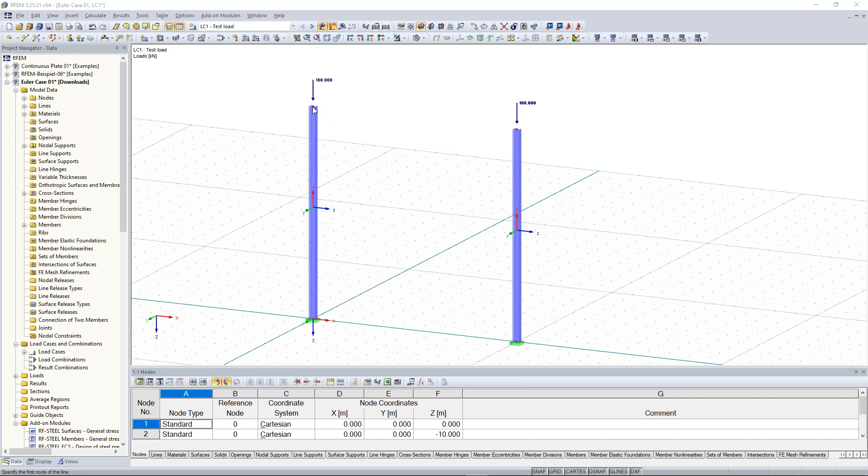Good. Now I need here a girder for the frame, and therefore I create a new cross section. In this case, also a new single member. I click here in the symbol bar, new single member, and I create a new cross section for the member start. In this case, I choose the IPE 300 profile. I can also enter this in the cross section description. Material remains steel. Click on OK and draw it from the left column to the right column.

Okay, good. Now I want to change the height of this frame. Therefore, I select both nodes, right click on the member - doesn't matter, member or nodes - and then I can choose here the nodes and say, okay, I want to edit it. And because they have the same coordinates, I can modify here the z-axis, so the z coordinate. And I choose here -6.

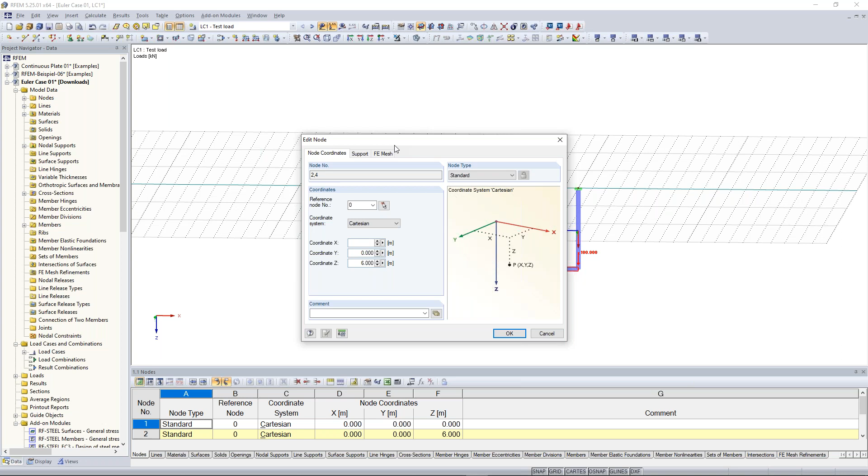So, what was the mistake? The mistake was that I also deleted the minus, and now the system was oriented according to the global z-axis, and my global z-axis is located downwards. Therefore, also the coordinate z plus 6 shows in this direction. But I want it like that, -6. So, but no problem, you can change it afterwards very easily.

Good. Now, the same thing again, let's do the stability analysis. Therefore, click here on RF-STABILITY again. And now let's show us a little bit more eigenvalues, 6 for example. Calculate it.

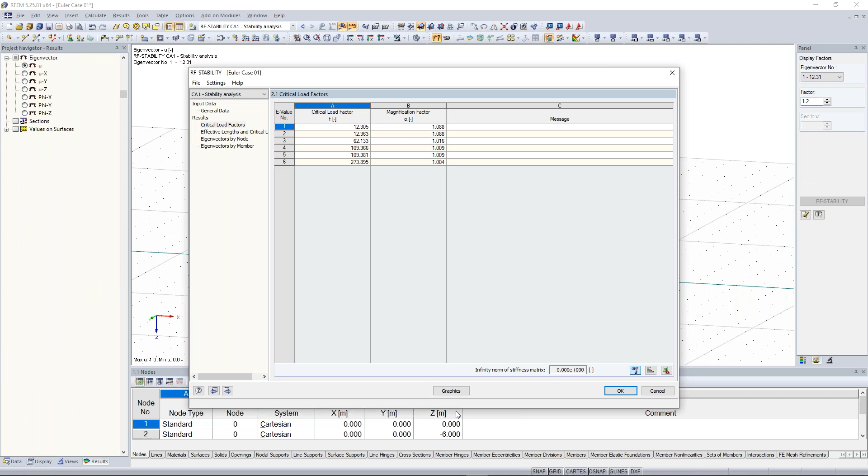And now let's watch the eigenvectors. We can see that we have a deformation out of the plane. Yeah, and normally this isn't so good for frame structures or for steel halls, and we try to prevent these situations. Jump to the next eigenvector. Here the same, we have deformation out of the plane, so the eigenform shows out of the plane globally, so the whole system.

The third eigenvector is that eigenform that we know maybe also when we have eigenforms in plane. And maybe also watch the other one. This is also out of the plane. How can we prevent this failure out of the plane?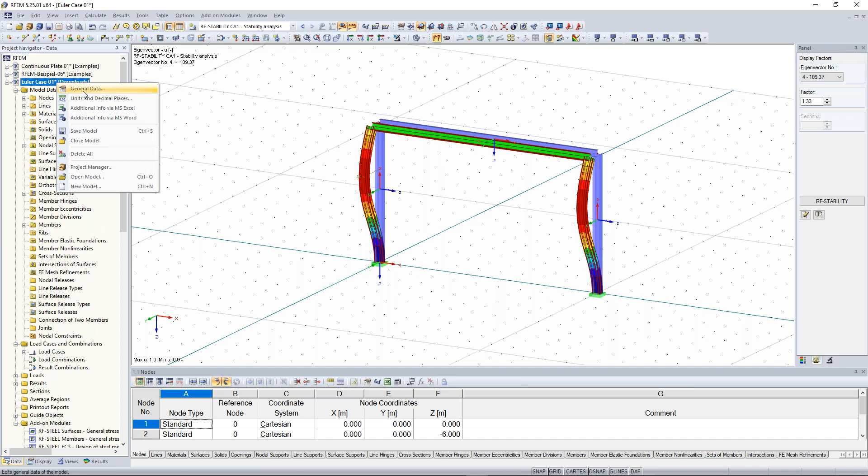There are two possibilities. When I want to calculate it just 2D, I can assure that out of the plane, buckling out of the plane isn't possible. Then I just change here at the general data, right click, general data, the type of model to 2D, XZ. Let's do it.

Calculate RF stability again. And now let's watch the first eigenvalue, and this is this one. And when I switch to the other ones, only in the plane, and so on.

So, but how can I prevent this when I have a 3D model? Because normally structures are in 3D. So, general data, 3D again. I can add here additional supports who carry loads from the global y direction.

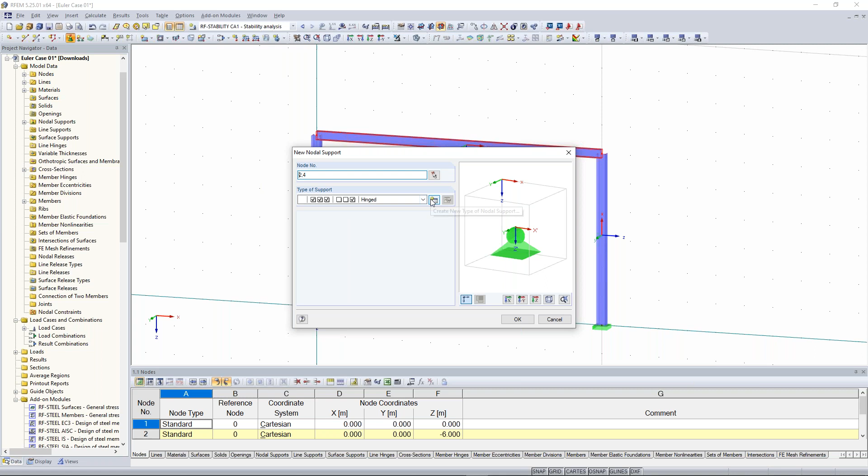So I select here the upper nodes, create here new nodal support, and now I want that this nodal support carries only forces in the global y direction. Therefore, create new type of nodal support. I activate the deformation in this direction, and in this case it's UY. I click on OK, and let's see what's gonna happen if we have the same cases.

Again, the first eigenvalue is here, this one. Next one is this one. This is out of the plane, but only the column, not the upper girder here. This is important to know. So this is more a local failure. This is a global failure. This is important to know.

I have forgotten one thing, honestly, I'm sorry about that. It can be possible when you take a look to the effective lengths, you can use them also for stability analysis for this steel design, for example. And when you calculate this with your hand calculation and compare the results, it can be possible that your effective length calculated by hand and the result by this program can differentiate, they can be different. This is because of the activation of the shear stiffnesses. So let's take a look to the results maybe.

Effective length, remember just here, this one, effective length, 9 meters, okay, 9.163. When we change here the calculation parameters and deactivate the shear stiffness and calculate this again, and take a look to the results, we see here different effective lengths. This is due to the shear stiffness. So keep that in mind when you want to compare your hand calculation with the results of the program.

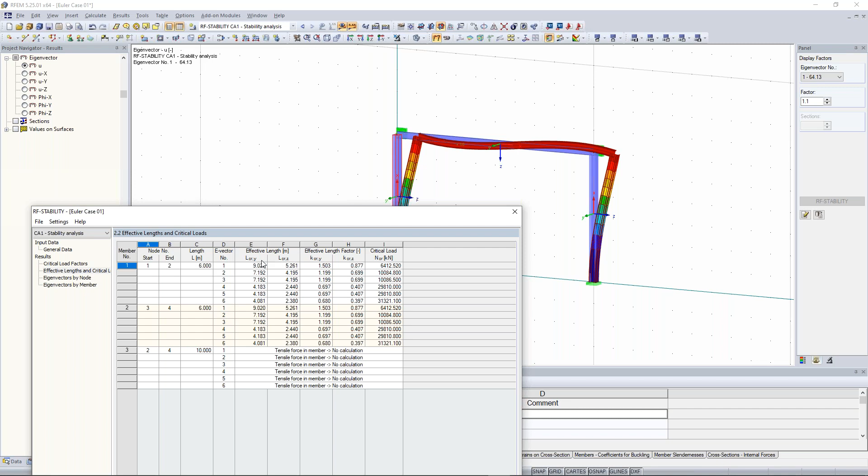Nine meters is this member length here. So you have to imagine that this is the member length here, something like that. Good. I think this was everything. Bastian, are there any questions, or should I show something again?

There's no specific question, but maybe you want to show us how you can create a joint in the beam, or a joint connection between the column and the beam.

In general, when you use the beam type, every member has a member type, and this is the member type beam. This means that every member is connected to the other one rigid, so no hinges, stiff connections and stiff joints. When you want to add some hinges, like member hinge or also kind of springs, you can add here member hinge.

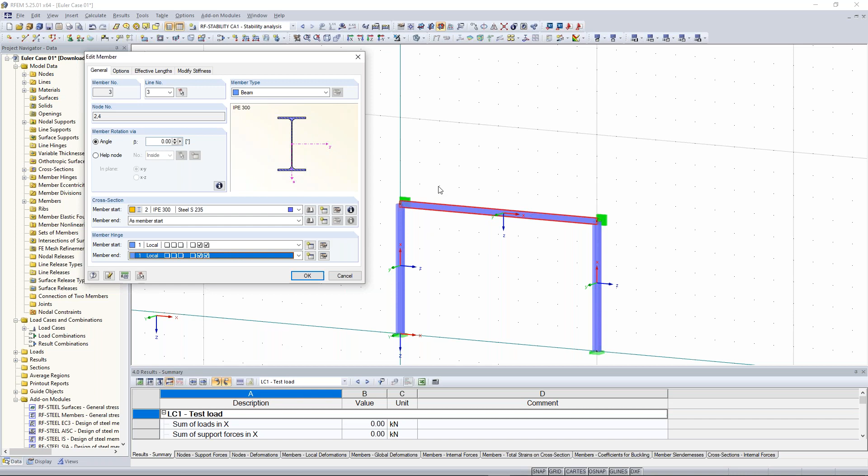In this case, the member direction, according to the local X coordinate system, shows from left to the right side. So on the left side I have the starting node, and on the right side I have the end node. Therefore I will get on both ends this member hinge. Now you see here this white node.

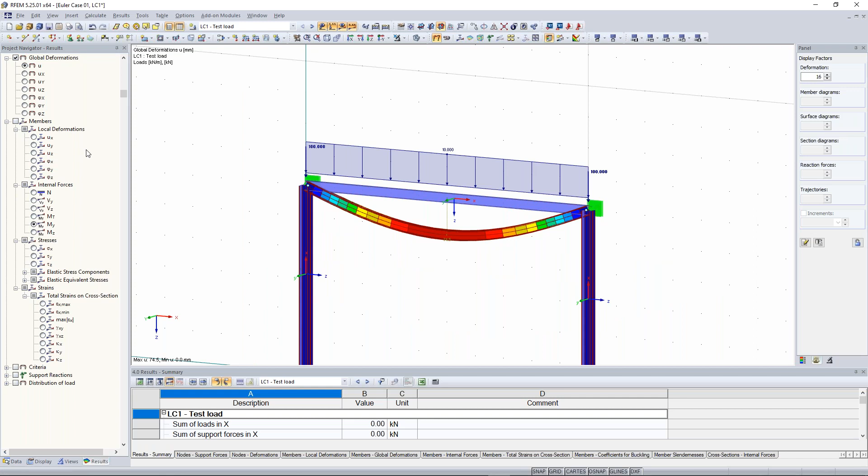And now see what happens when I calculate it, maybe concerning deformation. Maybe it would be better when I have a distributed load there, then you can see the results a little better. You see here the deformation, I think that's pretty clear. And also the bending moment, at both ends I have no bending moments.

And the same thing, when I have one beam which has on both ends member hinges, then instead of this beam with both member hinges, I can create another member type, this truss member type. We also offer other kinds of member types, but we come to those in other parts of the training. So I choose here truss. Truss means that I have on both ends also hinges. I click on OK, remember the 125 kilonewton meters, I click on calculate.

And you will get the same result. Good, Bastian, any other question? No, you just solved the last question by using this truss member. So no more questions.

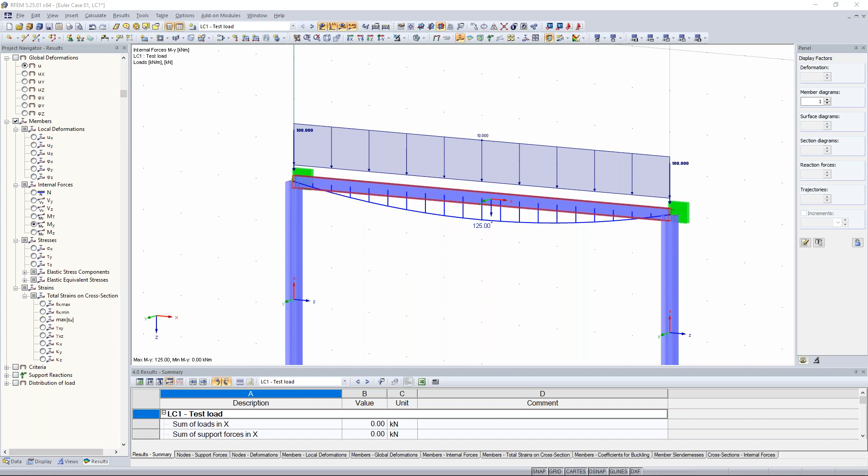Very nice. Now I have prepared the last question for you, Paul. Please answer me that.

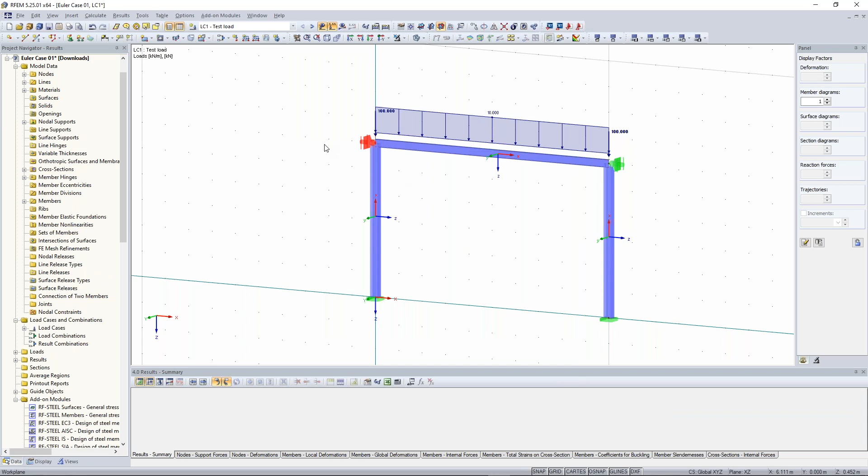But what I wanted to ask is, let me show it to you here at RFEM. When I want to have a support node which has only horizontal forces, I have to activate ux and uy, these two here. Sorry for that bad formulation of the question. But when I have something like this, then horizontal forces in x and in y direction are considered. Okay, good.

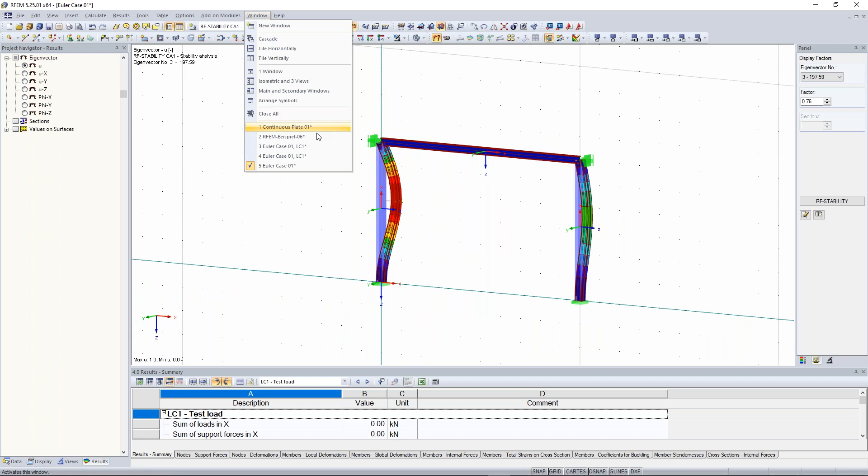Now let's jump to the continuous plate. And there was one question: why do we need phi X for beam hinge in the previous example? I think you mean this one, this nodal support. Oh, come on, this one I can tell you why.

Because when we calculate this like that, the beam would rotate over its own axis. This would cause an instability. I can show it to you, and therefore we have to close this direction, or deformation, otherwise it won't be possible to calculate it.

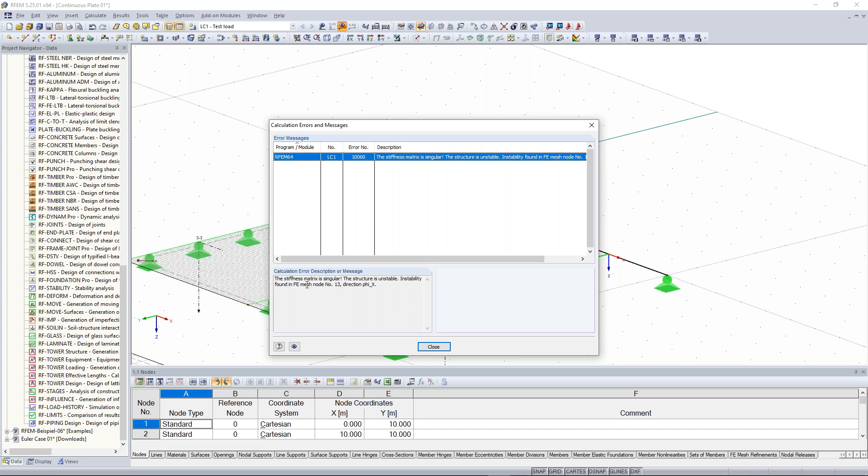The stiffness matrix is singular, instability found, structure is unstable, instability found in the FE mesh in direction phi x. Therefore, we have to close this possibility of movement. And then it works.

So now the other question: can you model a two-way slab in 3D and compare it to hand calculation? We will do this in the other parts of the training. And yes, today's training or webinar was free for students.